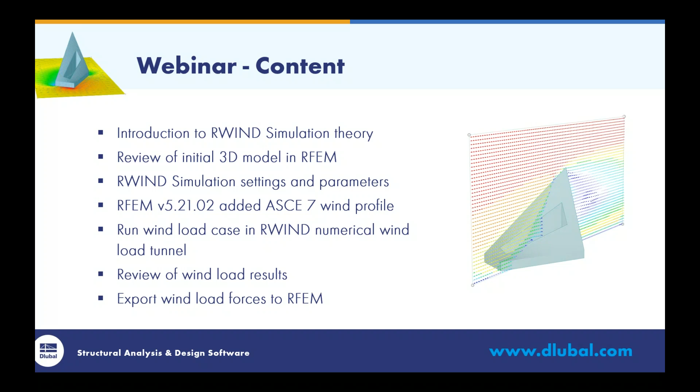RWIND Simulation has actually been a joint collaboration between 3 companies over the last several years, and this includes Dlubal Software, as well as PC Progress and CFD Support. The program utilizes a CFD numerical analysis, and this stands for Computational Fluid Dynamics. What we're doing here is to simulate fluid flow around the structure in a numerical wind tunnel. We currently utilize the OpenFOAM CFD solver, but there will be many more solvers in development, and we'll release those as we come out with them.

In particular, this OpenFOAM solver in RWIND is called simpleFoam. It is for steady state, incompressible turbulent flow. It utilizes the simple algorithm, which stands for the semi-implicit method for pressure-linked equations. Now we have much more information behind the theory of the program that's available in our RWIND manual on our website. But ultimately, we're going to run this calculation in order to get the 3D velocity fields and pressures within the entire wind tunnel. Then from here, what we'll use is the exterior surface and member pressures on the structure to calculate the wind load forces.

When it comes to the CFD finite volume mesh, this is a pre-processing method that is extremely time consuming. We must ensure that all mesh edges have exactly 2 adjacent triangles, that triangles cannot overlap each other, and that model boundaries must be closed. So an engineer might find themselves spending a significant amount of time just creating this volume mesh.

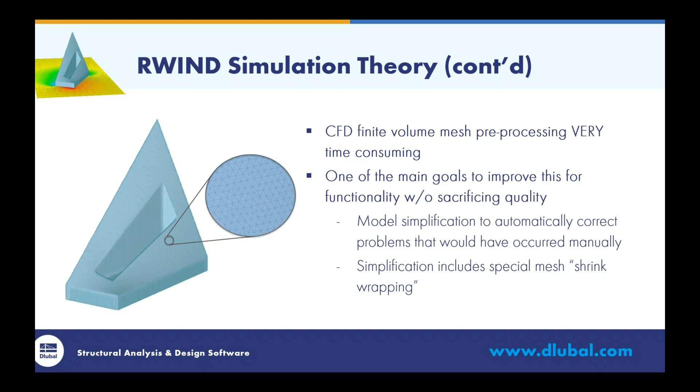If we take a look at the various points we're going to address with this simplified model and the mesh shrink wrapping, the first is to eliminate details that are not relevant to the simulation. A perfect example of this is these 2 flower models over here on the upper right. You'll notice with note number 1 here, we're pointing to the inside of these flowers that have quite a bit of detail going on. By simplifying this detail, we'll go ahead and simplify the model, create a better mesh, but it won't sacrifice our wind loads on the structure. Essentially, these details are not important.

Number 2 is to address the intersection of triangles, and this is denoted by point number 2. Remember that I said that each mesh edge has to have exactly 2 adjacent triangles, and triangles cannot overlap each other.

So you can see by point number 2 that this is not the scenario here, so this is not an ideal mesh. Number 3 is to address open edges and apply zero thickness surfaces. We have these open edges indicated around the exterior of this flower as well as down on our building here for our next example.

So what we can do with these complicated open edges is simply apply a zero thickness surface to simplify that model further. Number 4 is to close the openings to prevent interior airflow.

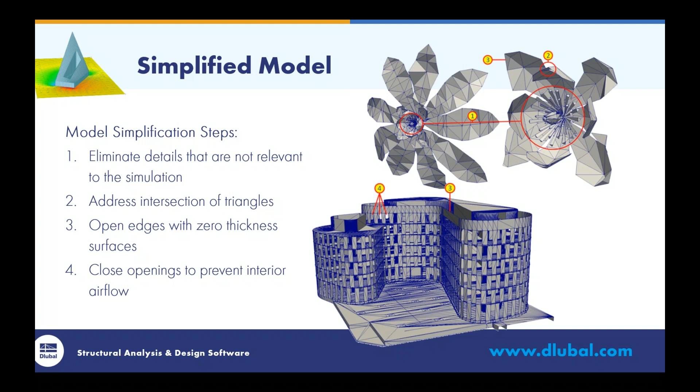So within our wind analysis, we're going to address each one of those points, 1 through 4, with that shrink wrap. Again, I mentioned that we're going to eliminate details that are not important, and we can see that with the same two flower models on the right. We've now eliminated the detail at the center of the model, but this isn't going to affect the CFD analysis and overall wind loads enough to matter. So by simplifying, we can decrease the overall mesh.

Number 2 is the intersection of triangles. Again, each mesh edge has exactly 2 adjacent triangles. The mesh on the left is pretty fine, while the mesh on the right is quite a bit more coarse, so we can see exactly how those triangular mesh elements are lining up adjacent to each other.

Number 3 is to close the open edges. Again, on this model on the right, we can add a zero thickness surface here to close those open edges and simplify further. Number 4 is to close openings to exclude airflow where it doesn't exist, which we can see with our building model down at the bottom. We've closed all those window and door openings.

Now, there is a very important assumption: if this simplified model approximates the original model well, then the calculated wind loads are going to be correct. This is really no different than making sure our mesh is refined well enough to get accurate results. Same concept applies to the simplified model and mesh shrink wrapping around our structure for CFD analysis.

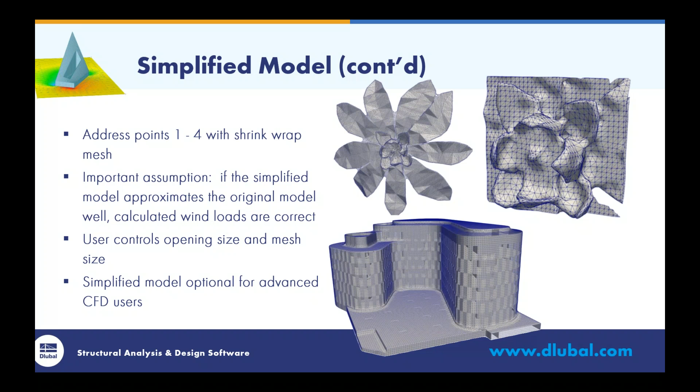There is the option to turn off the simplified model, but this is really only suggested for advanced CFD users. So most of us on today's webinar will always leave this option checked. I'll show you that in the example as well.

A very common question that we have been asked since we released this program is the role of CFD with engineering standards. So I just want to spend a few minutes talking about this discussion point.

The engineering codes such as the ASCE 7, the NBC, and the Eurocode all provide minimum engineering requirements and loads for safety considerations, and of course this includes wind loading.

When we take a look at the ASCE 7 and the various wind load methods, this includes the simplified method for any simple structure, the analytical method for any more complex structures, and finally the wind tunnel method, which is for structures that don't fall within these simplified or analytical methods.

And you'll notice that I did not mention CFD in this list. So the question might be, well, how can we use CFD then when it's not necessarily listed within these standards? How can it still be a useful tool?

That brings me to my next slide here, where I'm going to discuss several points on how we can use CFD as a cost-effective engineering tool for many useful applications.

Now notice that I have underlined tool. We really are not looking to replace the standard and the minimum requirements, but rather how can we utilize this along with the standard to better narrow our focus on how wind loads will affect our structure.

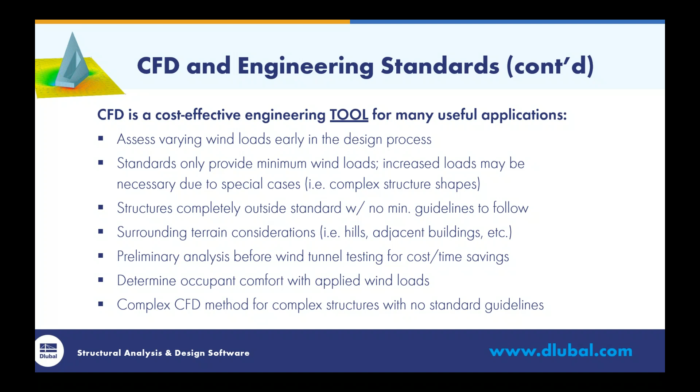Finally, I want to make clear that these complex CFD methods are for complex structures with no standard guidelines. We are not promoting this program to be used with completely rectangular structures. It's easy enough to flip open the code and get those minimum design wind loads. But these are for the structures that we can't so easily refer to the code, and we really have no idea how our wind loads may impact. That's what we really want to promote our RWIND simulation for.

Okay, so that is enough behind the theory. What I want to move on to is our example today and how our RWIND simulation works with our finite element analysis program, RFEM. So we will begin today modeling our structure completely within RFEM.

This includes surfaces, members, and solid elements. Today's example is only with surfaces, but keep in mind that RWIND can definitely handle members and solids as well. So essentially any structure is possible.

We also can set up our various load cases, so dead load, live load, snow load. But when it comes to our wind load case, this is where we're going to export the structure geometry into our RWIND simulation. Here is where we run the CFD wind analysis. And then we can import those wind loads back to RFEM. Now we have a typical load case for wind that we can combine in our load combinations within RFEM.

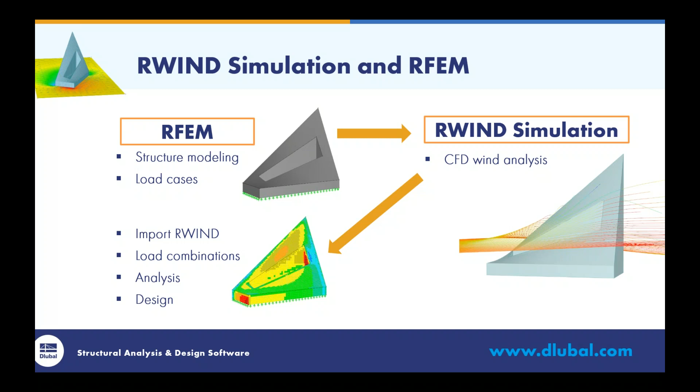Wind, along with dead load, live load, and snow load, can all be considered together, and we go about our analysis within RFEM as usual. Eventually we can move into the design add-on modules. That's a little background on the theory and how the programs work together. Now let's get started with our example today.

You'll notice here that I've modeled a very simple but interesting geometry for our structure within RFEM. For anyone joining us today from New York City, this structure may look familiar. I modeled it after the building located in New York City called Via 57 West. You'll notice how interesting the geometry is. First we have this triangular type structure, but even more interesting is this huge opening right here in the center, which goes all the way down to the courtyard at the base of the structure.

So although it may be applicable to refer to the standard to get minimum design wind loads, I would certainly say that the standard does not address a building with this type of geometry, especially with this large opening in the center. That's essentially what I've done here.

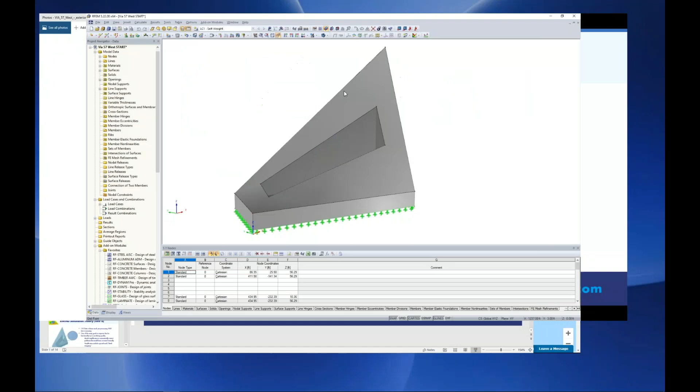You'll notice that I created this structure and it's very simplified. I didn't add any windows or doors. The interior of the structure is not modeled, it's just to get the overall basic geometry. We can see that I've modeled this with surface elements. We have double curvature at the front of the surface, and I've taken into consideration the large opening right here in the center. So this is just the basic geometry of our structure.

Now I've also set up a single load case here for self-weight. I haven't created any other load cases quite yet, but let's move into our first wind load case scenario.

Under Calculate, I can access our wind under RWIND simulation, where we can simulate and generate wind loads. This brings up my dialog box here that I'd like to go through in a little further detail in order to set up our parameters for our CFD analysis.

The first step is to define the wind directions. You'll notice that the program automatically sets a uniform step here. So if this is set to 45 degrees, you'll notice that every single direction is defined: 0, 45, 90, and so on. We could change this to 90 degrees, and now we have only 4 defined directions.

You'll notice that on the second tab here, this lists out the individual load cases. So we have wind in the 0 degree direction, 90, 180, and so on. Now, if you only have a few different scenarios that aren't necessarily defined at each one of these steps, we can manually define the direction. Let's say I want 35 degrees and 135 degrees. Again, on this second tab, we can see that both those load cases are automatically updated.

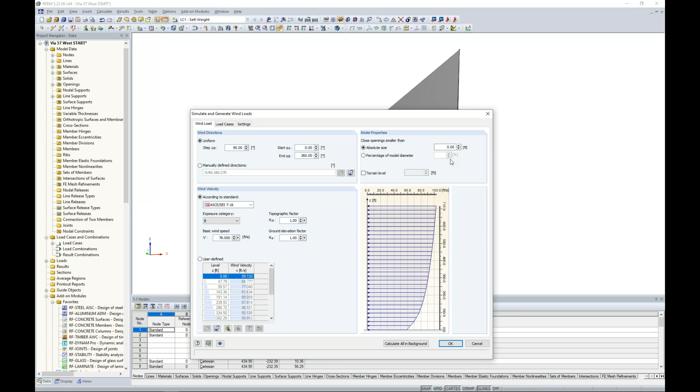Remember in the PowerPoint, I said the user has the ability to close the opening size that they define. In this example today, I don't have any openings necessarily, but if I did, I could enter in values here to close windows and doors. We do have an extremely large opening in the center, and I certainly don't want to close that because I want the wind flow to be allowed to move freely within that area. So for today, we'll just leave this as 0.

Now the terrain level - if we had modeled a basement for our structure and we do not want that basement height to be exposed to the wind profile, we could set the depth here. For example, if we had a basement that was 30 feet in height, we can type in 30 feet, and now the wind profile will be applied at the elevation of 30 feet and above. We don't have a basement for today, so we can leave this unchecked.

Then we have the wind velocity, where we can define our wind parameters according to a couple of standards here. We have the Eurocode available to us, and just last week we released the ASCE 7-2016. Now, if you are utilizing a standard which is not found here, such as the NBC code or something other than ASCE 7 or Eurocode, it's no problem, because all you need to do is define this user-defined option.

This allows you to define the wind profile, including the wind velocity as a function of height. You can import and export directly to and from Microsoft Excel, which might be quick if you generate a spreadsheet and import those values here.

The basic wind speed is defined as a velocity in feet per second. This information should come directly from ASCE 7 and the wind load maps. It might be helpful to take advantage of our GeoZone tool on the Dlubal website. You can find this tool at dlubal.com. Under Solutions, you'll see the GeoZone tool available under Online Services.

What we've done here is consider all of the loading maps for snow load, wind load, tornado, as well as seismic, directly from the ASCE 7 standard. We've synced it with Google Maps, so all you need to do is type in your address and hit search. The program will give us the relevant values from ASCE 7.

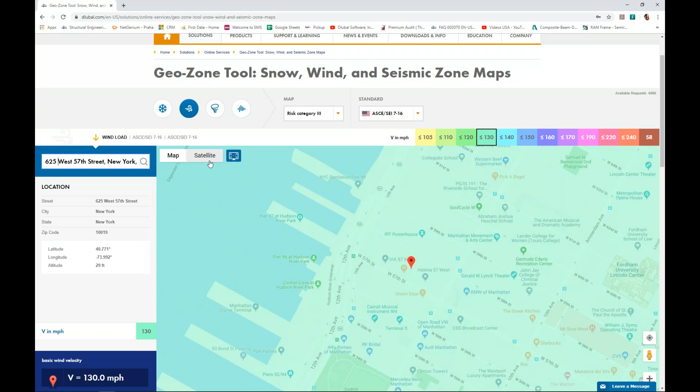For our example today, our address is located at 625 West 57th Street. The program automatically determines that this is located in New York City. We can use our zoom function to zoom in all the way to where our project is located. We can even turn on the satellite view, and sure enough, we can see our structure, 57 West, located right here where our map is pointing.

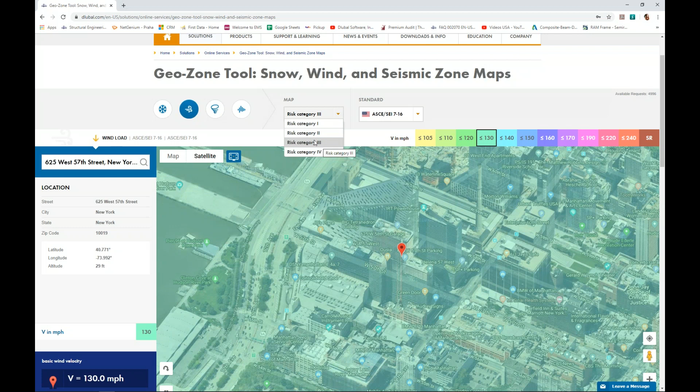We just need to determine the risk category here, which is set to risk category 3. Ultimately, the program gives us a basic wind velocity of 130 miles per hour, again coming directly from ASCE 7. So it's a useful tool if we're trying to quickly figure out what this wind velocity should be. We convert this to feet per second, and we get 190.67.

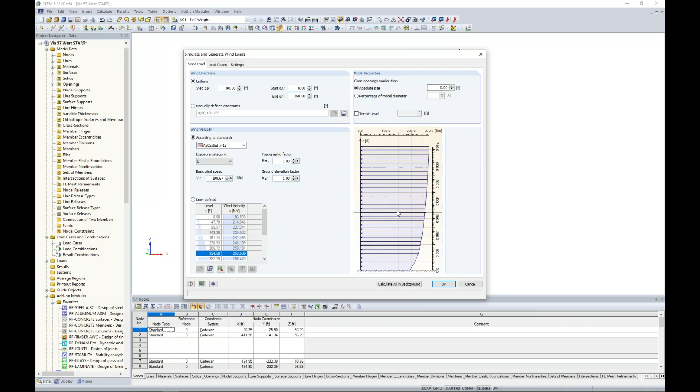Based on all of this information, our wind profile updates automatically, so we don't need to do anything further. We can also see it graphed out on the right-hand side.

The second tab, which I've already briefly mentioned, just lists out the various wind load cases depending on which direction our wind is coming from. We'll get back to this in just a minute.

The third tab is the settings for the CFD analysis, which is a bit more theoretical than what we've seen so far. The flow parameters for air density and kinematic viscosity must be defined. It depends on where your project is located, especially with elevation. The defaults here are relatively close to what you'd find at sea level, so we can leave those defaults, but certainly determine your air properties for density and viscosity for your project and input them here.

The calculation parameters include the density of mesh for the fluid dynamics calculation. This is used for the model simplification we talked about, and the fluid calculation controls the finite volumes around the structure. We'll see this in a minute, but this refers to the actual wind tunnel itself and our 3D finite volumes.

The default here is 10%. The range is anywhere from 10% to 100%. Obviously 10% is the most coarse, with 100% being the most precise. But keep in mind, when you set this to something like 100%, the calculation time could take anywhere from several hours to several days. So you want to determine a good balance so you're not waiting too long, while still getting accurate results.

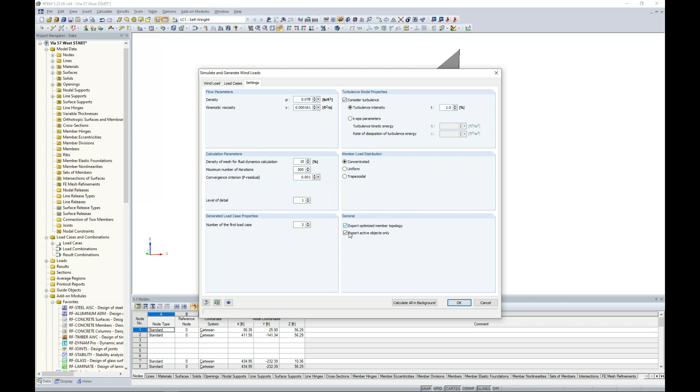But by all means, if you would like to export out the exact geometry of these cross sections, you could uncheck this here. This checkbox to export active objects only refers to if we had some other elements back in the RFEM model that we had modeled but didn't want to be considered for the wind load - we could deactivate them. In our case, it doesn't matter whether we check this or uncheck this because we only have one structure.

Okay, so back under the load cases here, we are now ready to begin our calculation within RWIND. The most efficient option would be to choose this button here that says calculate all in background. So what essentially will happen is that RWIND will never open - everything is going to happen behind the scenes. The program will run that calculation, and eventually we're going to get checkboxes here for calculated, and the load cases will automatically be available to us within RFEM.

Now, on the other hand, if you're wanting to see the actual calculation within RWIND, which we do today because I want to explain several of the program features, we can place our cursor on any one of these wind directions.

Now, these angles are based off the global x-axis, and this is true in either program. The x-axis will be oriented in the same direction. So when we are considering wind from the 0-degree direction, we're going to have wind flow from left to right on the structure. This structure is at a skew, so I'm not going to have wind directly normal to the front face, but rather at somewhat of an angle.

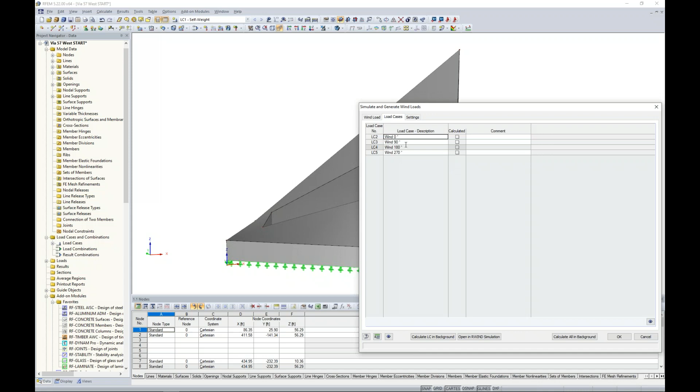So it should be quite interesting to see once we get into RWIND. And of course, we're just going to move around in a full 360 circle until we have fulfilled all of these different load cases. For today, let's just consider the 0 load case. I'll put my cursor in that cell, and I can open RWIND simulation.

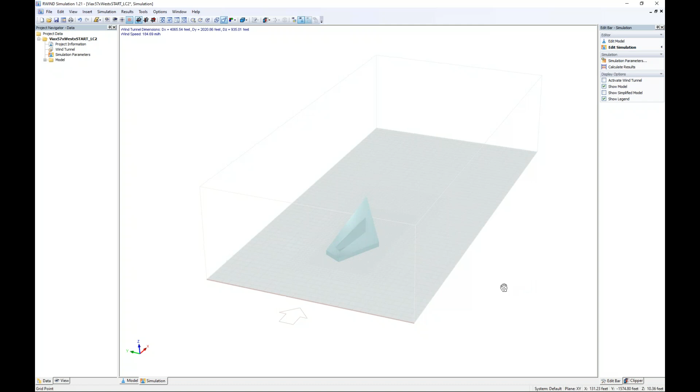You'll notice that within a split second, my structure geometry is imported into our standalone program, RWIND. We can zoom in to view this structure, and the model geometry is quite exact. It includes that double curvature front surface, and you'll notice we also have our opening located up here at the top. Everything is brought in directly from the program without having to select any further modifications.

The first thing I'm going to do is activate my wind tunnel, which I can do under my display options. So here exactly is our wind tunnel where we're going to run this numerical CFD analysis. If I change my view settings to the reverse Z direction, I'm now looking at a plan view, so we can see my structure. As I mentioned, it's located at a skew in relation to how the wind flow goes through this tunnel. By the big red arrow, the wind flow will be from left to right.

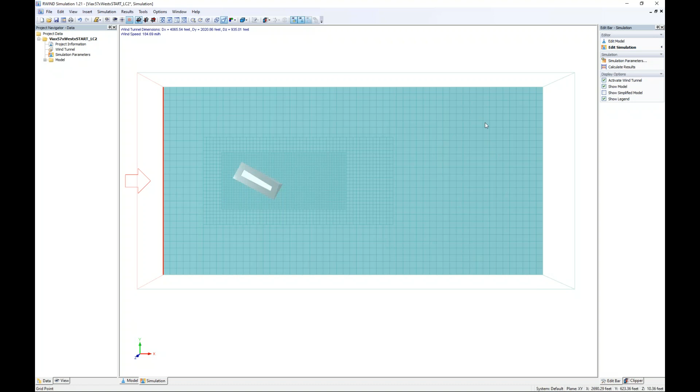You'll also notice the meshing of the wind tunnel itself. This is what we have set with the density of the mesh at 10%. When we're on the exterior of this wind tunnel away from the structure, it's quite coarse, but as we move in closer to the structure, you're going to see a more refined mesh.

Going back to the isometric view, let's take a look at the simulation parameters. I'm going to double click the option in my project navigator. Realistically, this is all information I've already set within RFEM, but I do have the ability here to make any changes if I'd like. Just know that we don't need to repeat any of this information—it's brought in from RFEM.

For example, we have the flow parameters, which includes the inlet velocity—the wind speed entering the tunnel. We also have the kinematic viscosity and the density of our air. Remember, we left those at default.

We also have the finite volume mesh settings, which we had set to 10%. Notice that as I use this slider bar to increase this, my mesh changes on the right-hand side—we're increasing the number of 3D volume elements for an increased mesh total. That's going to change quite significantly, so you can imagine when we're all the way at 100%, with these many 3D volume elements, why it takes such a significant long time to run the calculation.

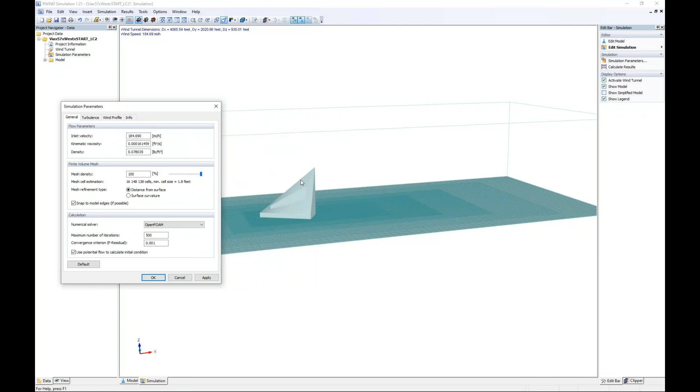These mesh cells are only 1.8 feet wide, and keep in mind this structure, although it looks small, is about 480 feet high, which was modeled in RFEM. So we'll go back to 10% here, for a mesh cell size of about 18 feet.

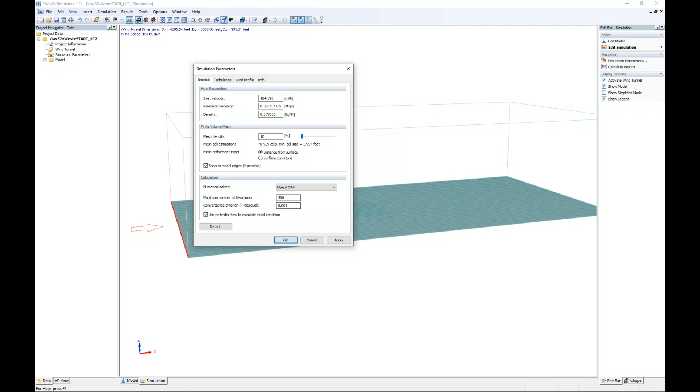The calculation utilizes the OpenFOAM numerical solver. As I mentioned, we're working on more solvers in development at the moment, so this is the one we'll be taking advantage of. The max number of iterations and the convergence criteria, 500 and 0.001, were brought in from RFEM. Same concept for our turbulence tab.

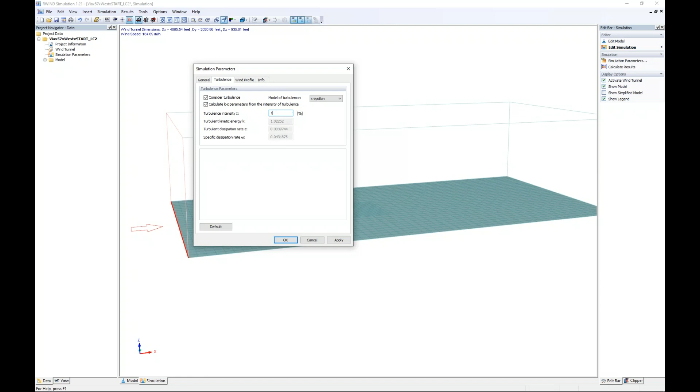Here we have set the turbulence intensity to 1%. You'll notice that the turbulent kinetic energy, the turbulent dissipation, and the specific dissipation are all calculated automatically by the program. If we change this to 5%, again you'll see these numbers change. We'll just be going with the 1% that we previously set.

And finally, we have our wind profile here, which again is the information we set according to ASCE 7—simply the wind speed as a function of height as we move up along the height of our structure. We can make changes to this here as well.

So I'm actually going to hit cancel because we want to leave everything as we've previously defined it. Similar concept for our actual model here.

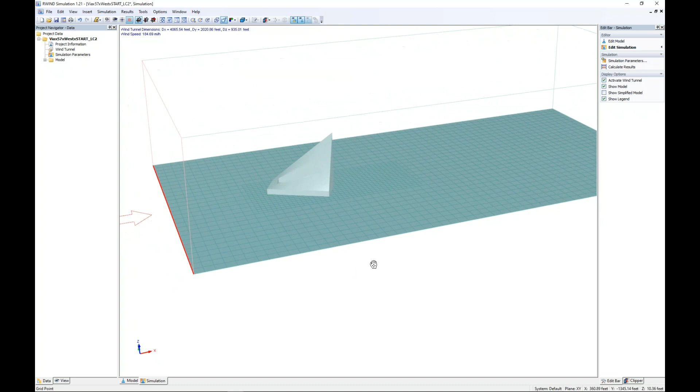Under the model tree, I can double click and see a few of the settings brought in from RFEM. One thing we didn't specify in RFEM is that this is the primary model. The program automatically recognizes this and puts a checkbox here. A little bit later on, when we consider adjacent buildings, you'll see how this differs. The model simplification is set to 1 for the level of detail.

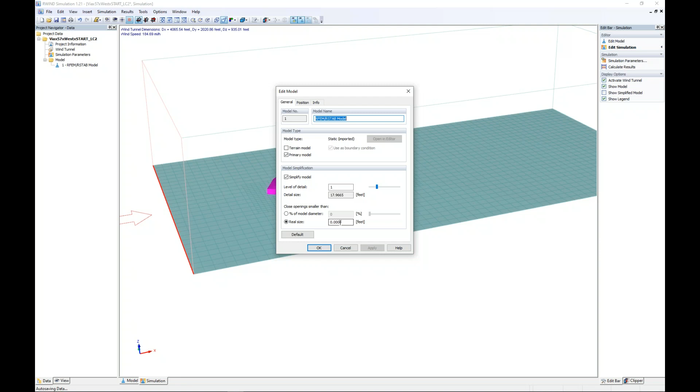Let me also quickly mention, you see this checkbox here for simplify model. Remember, you do have the ability to turn off the model simplification, but it's only suggested for advanced CFD users. So the level of detail we've set to 1 for our example today, just for a pretty quick calculation since we don't have much detail we're worried about. We also have the openings that can be closed for any distance we specify here. We will not be making any changes, so we can click cancel out of this. I just wanted to quickly go over it.

The final thing to discuss before running our calculation is the actual wind tunnel itself. So I can double click the wind tunnel settings, and you'll notice the dimensions are defined with different points. We have a point at the upper right corner, the lower right corner, and the upper left corner in the back, which defines this rectangular wind tunnel for us.

Now, if you want to make any changes here, you can. The program automatically adjusted this wind tunnel based on the structure we're bringing in from RFEM and its geometry. But if I decide I want to extend this wind tunnel to maybe 4,000 feet in the back, I can just type that in. I'll hit apply, and now you'll see my wind tunnel is extended.

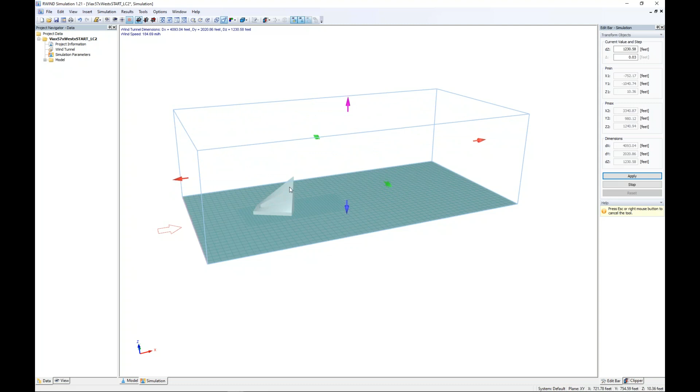In a similar sense, we have the ability to adjust this tunnel graphically as well, so we can choose this option here. Now we have arrows that allow us to slide in the dimensions, whether at the top or bottom, left or right, and that will automatically adjust our wind tunnel. Going back to the wind tunnel settings, if I've messed around too much and want to go back to the suggested size, we can click this option, adjust to model, hit apply, and now we're back to the original settings.

Okay, so we are now ready to run our calculation. We can click calculate results in the edit bar, and the program gives us a quick update list of what's happening, including the number of mesh cells. It's applying that shrink wrap mesh to our model, and it's also going to account for the closed openings, the level of detail, and all those parameters we've previously set.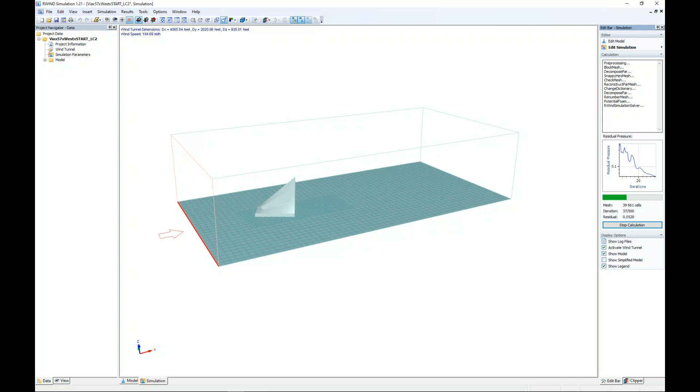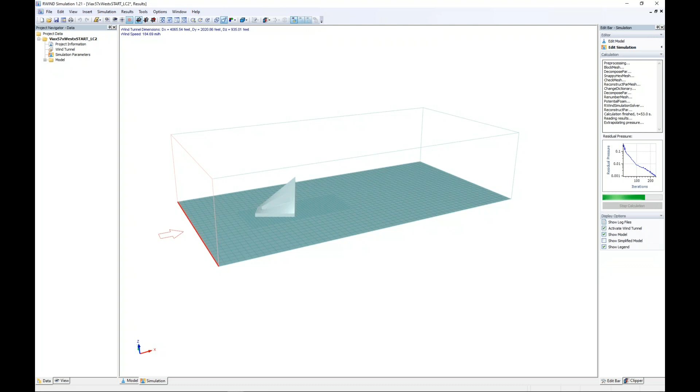I did want to mention too that the OpenFOAM solver is an extremely powerful tool for not only wind calculations, but also for fluid and heat. But with that said, all of the internal options within RWIND software were created with wind loading only in mind for the structural engineer. So although the OpenFOAM solver has those capabilities, maybe in other programs, it does not within RWIND. You only want to use this program for wind calculations only.

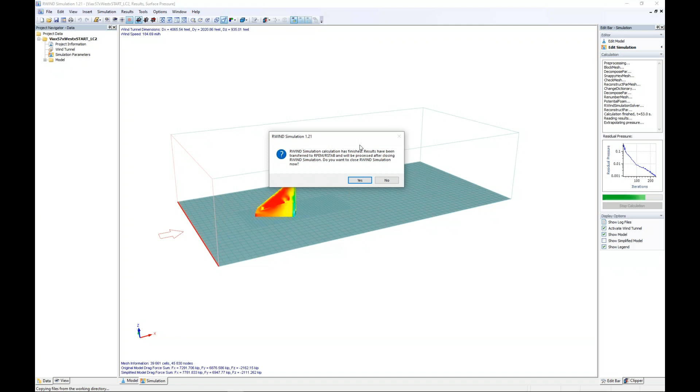So once we're done with the analysis, the program gives us this option and says the calculation is finished. Do we want to close RWIND? Yes or no. When we close RWIND, the results will automatically be imported into RFEM, which we'll see a little bit later on. But for now, let's click no and take a look at our results that are available to us in RWIND itself.

The first thing I can do here is deactivate my wind tunnel so we can see this a little more clearly. We'll zoom in here. Also, under the View tab within the Project Navigator, the interface is set up quite similar to RFEM for those familiar with it. Under the View tab, we can deactivate and activate different features we're currently viewing in the graphical interface. For example, I can expand the model tree and activate these triangular edges, which just shows me my mesh around my structure.

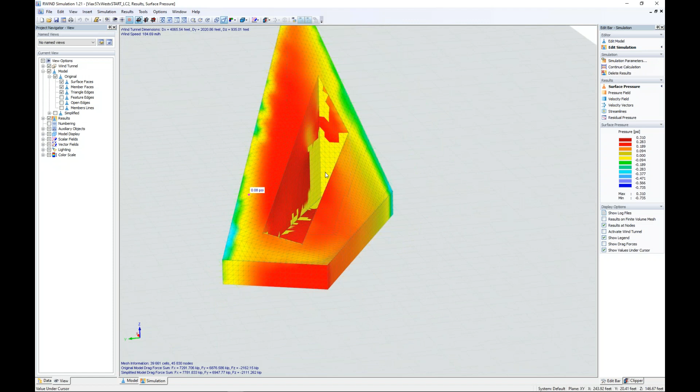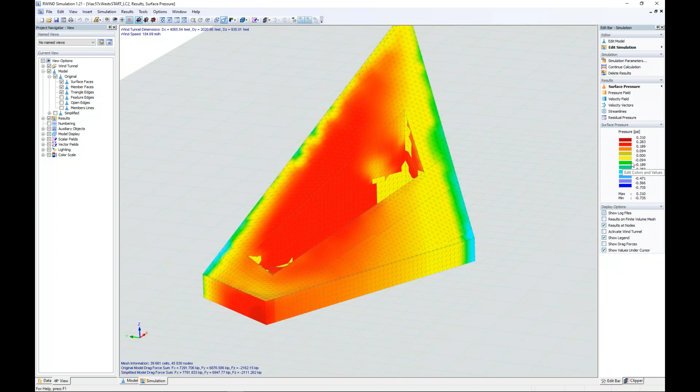I think this clarifies a little bit further what's going on with these wind pressures. We're currently viewing the results here for surface pressures on the structure. As I move my mouse around on the structure, I'm getting the pressure magnitudes, and the colors are based on the magnitude shown in our color navigator on the right-hand side. We can see even down into that opening how the wind is affecting our structure.

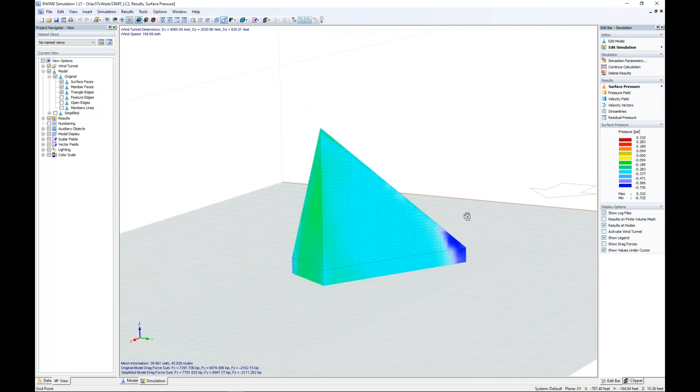We can also rotate the structure completely to the back side, and you'll notice a negative value is given. This means these are no longer compression forces, but suction wind forces at the rear of the structure, with the highest suction forces in the lower right-hand corner. Ultimately, what we're seeing here is the final results from the CFD calculation on our structure only.

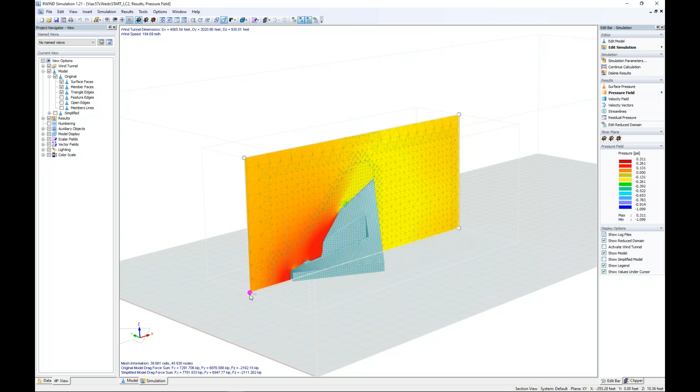What we can also view is what's called the pressure field. This is a plane which represents the wind pressure distribution of the airflow throughout the wind tunnel, not necessarily just on our structure, but throughout the entire wind tunnel itself. With the pressure field, I can simply drag this plane from left to right to see what's happening in this area around my structure.

In a similar sense, we can change the plane and drag it from top to bottom to view those various pressure fields. One thing to point out is I said this is throughout the entire wind tunnel, but it looks like it's really only isolated around the structure. That's because we have this option checked to show the reduced domain. When I uncheck this option, now we're seeing the pressure field throughout the entire wind tunnel.

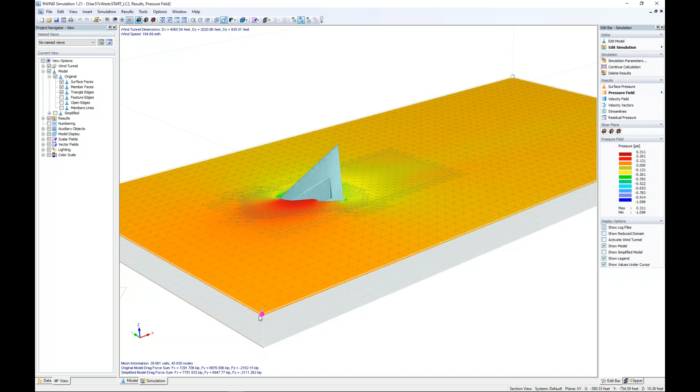We're making the assumption that you're probably most interested in the results closest to the structure rather than way out here within the wind tunnel, so that's why we've given you the option to show the reduced domain. The pressure is given here according to these various colors. You have full capability to change units within the program—right now it's given to us in PSI. If you want to make changes, you can find that under Options and Units.

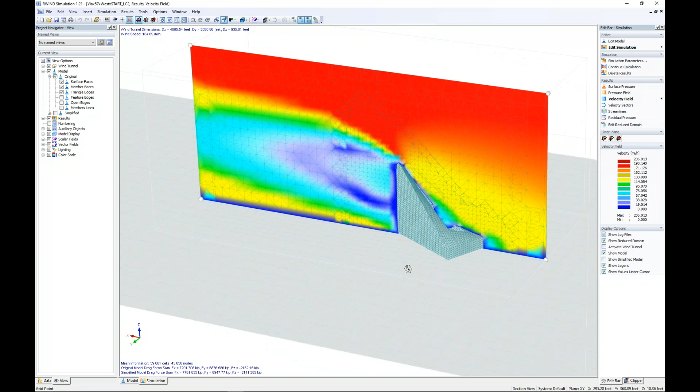In a similar sense, we have the velocity field. We can activate the velocity field, and similar to the pressure field, it's in a two-dimensional plane that we can move around our structure. What might also be interesting is to change the plane to view what's happening at the rear of the structure with a lot of those suction forces. All magnitudes are given here in miles per hour as a function of color.

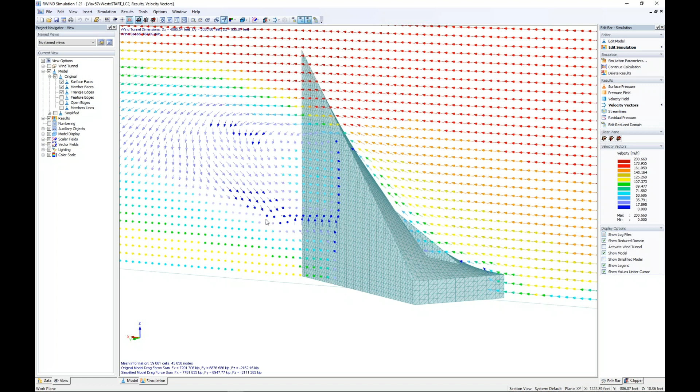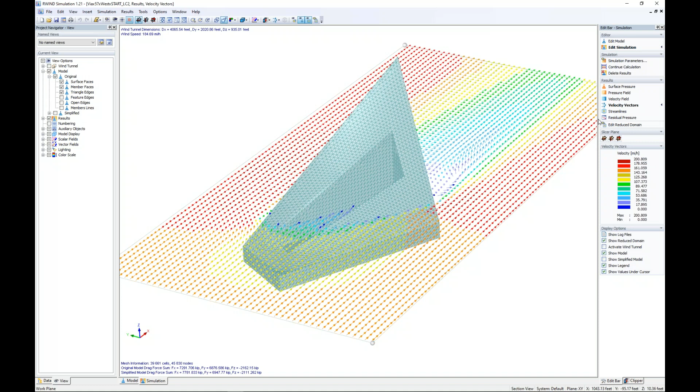The velocity vectors—for this I'm going to completely deactivate my wind tunnel so we can see this more clearly. The velocity vectors evaluate both the wind speed and direction, so now you'll see arrows showing exactly which direction the wind load is being applied. Changing planes here to our horizontal plane, we can take a look in more of a plan view at those magnitudes, those wind speeds, and also directions.

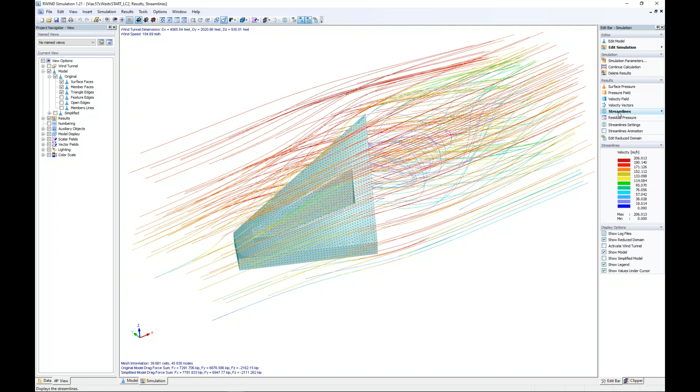And finally, this leads us to streamlines, which is probably going to give us the best effect for understanding our wind loads here. Streamlines are a composition of curves which are tangent to the velocity vector. Essentially, this shows the direction a massless fluid element will travel at any point in time, and again these colors vary by speed. Similar to just showing the streamlines as a static view, we can also activate the streamlines animation.

This is a great visualization, a nice video showing us these wind forces acting on our structure and how exactly those massless fluid elements are moving. If we want to export these videos, we can do so under Tools and Create Video File. This is extremely beneficial to send with your calculation package, or to any reviewing engineer, just to show how those wind loads are being applied.

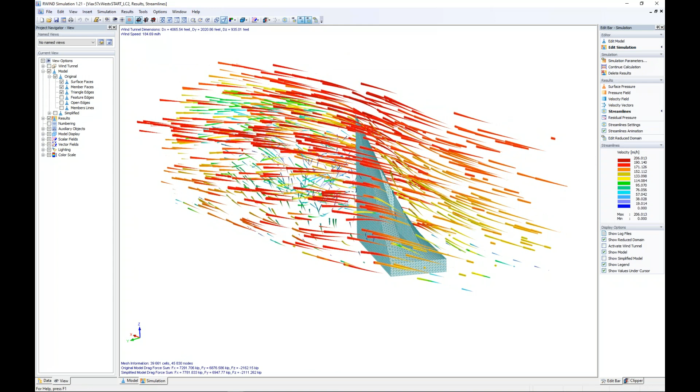So we can deactivate this animation, and I want to go into a few more options within these streamline settings because it is quite powerful what we have the ability to view here. The default is a 3D box, which we can see here. Now, similar to the wind load tunnel, we can grab this 3D box, move it, increase it, or decrease it.

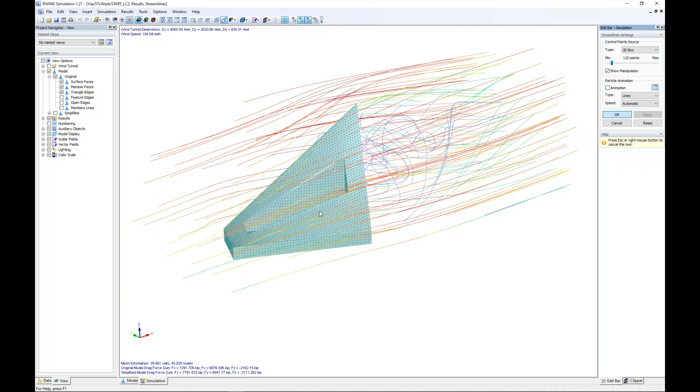We can also decrease the number of points, since it's pretty overwhelming right now. We hit apply and OK, and now we have quite a few less streamlined particles to show, making that video maybe a little bit more clear on what's exactly happening.

Going back to the streamline settings, not only do we have the ability to define a 3D box, but we have several other settings, including a segment, which is just a particular line. You can drag this line up and down, left and right.

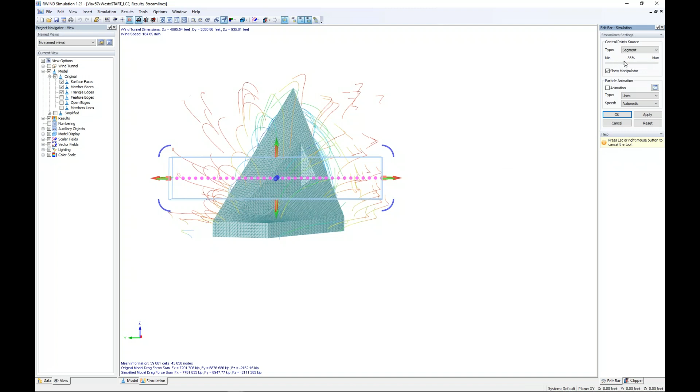Perhaps we want to increase the number of points significantly here. I hit apply, I hit OK, and now we can see how those streamlines are moving throughout our structure at just a single line element. Different ways to manipulate this view so we can see exactly what's happening at different locations.

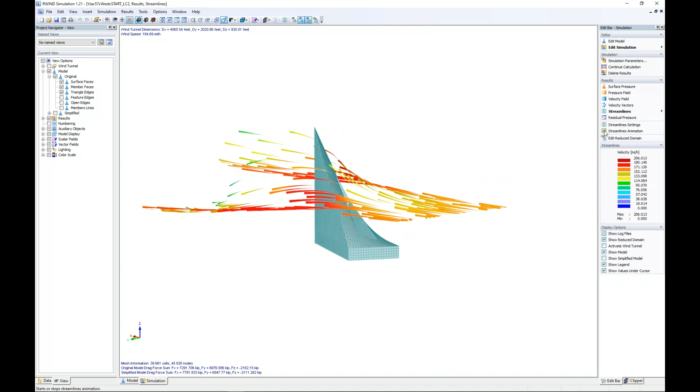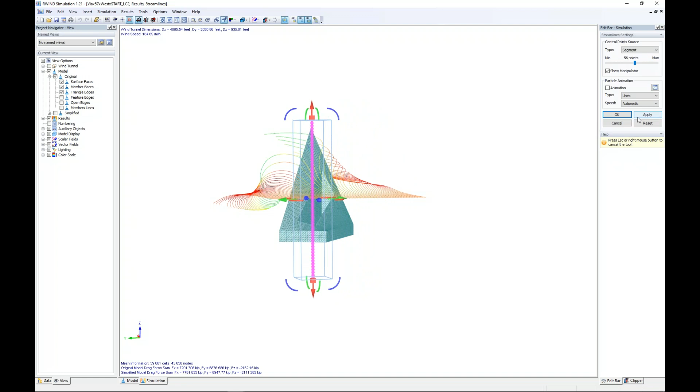What's also nice about these streamline settings is it doesn't necessarily need to be a horizontal line, but we can actually rotate it vertically. Let me move it in the vertical direction, over to the right of the structure a bit. We hit apply, move it a bit further over, hit OK, and now we can see it in the vertical direction as well.

So many options here, and this is endless, but you can add these to printout reports, and you can export these streamline animations as video files as you see fit.

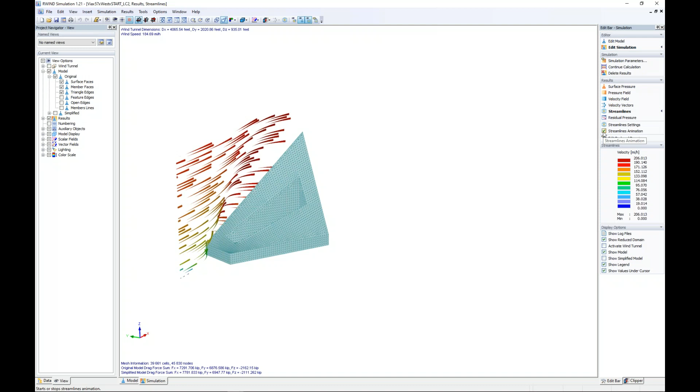Ultimately with these results, if we turn off our results, let's activate our wind tunnel again, and turn off this triangular meshing. We have only analyzed the structure within this wind tunnel by itself. If you remember back to the PowerPoint, a very powerful feature of CFD numerical wind analysis is to account for complex terrains or adjacent buildings.

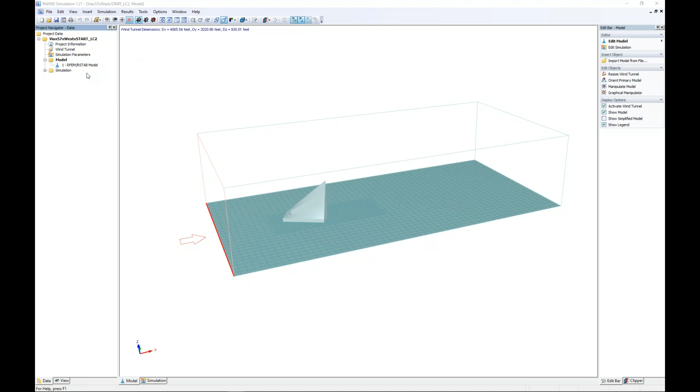So how do we do this? Under the Data tab, I can right-click on the model to import a model from file. I want to account for some adjacent buildings located right next to my project that will definitely influence the wind load. We have a few file extensions still in development, but what we do have available is an STL file. I use SketchUp, exported my adjacent structures as an STL file, and now I can easily import them here, found directly on my computer wherever saved.

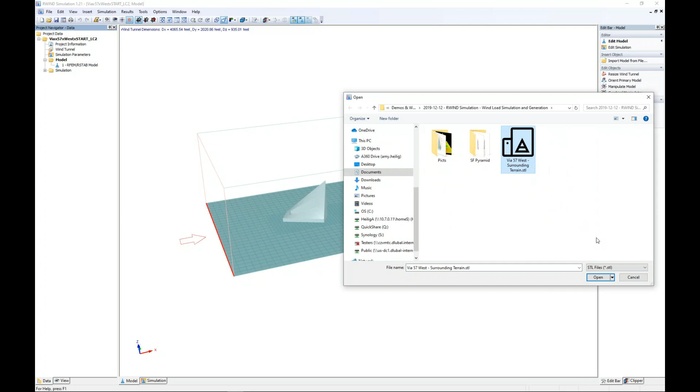I click open. I'm going to adjust the wind tunnel dimensions, but I'm not going to move the imported model to the origin. I'll make a few movement changes once I import. When I click OK, the program says my results need to be deleted, and I click yes, that's fine. Now let's deactivate our wind tunnel and zoom in.

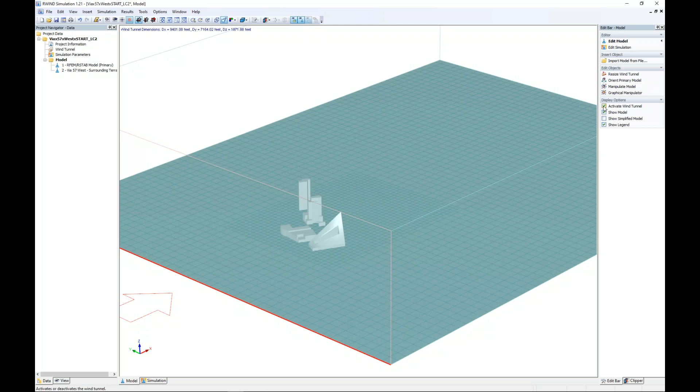I now have some adjacent structures to my original structure. The location of these isn't quite right, so I can either drag and drop it wherever I'd like, but probably the more accurate method is to double click, and you'll notice neither option is checked. The primary model is of course our model brought in from RFEM, so we don't want to specify this as the primary model.

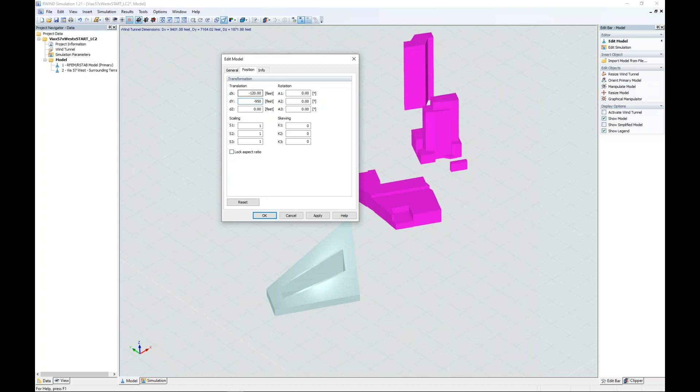If this was a terrain STL file, we'd want to modify this so the wind tunnel itself would be modified, but this is just some adjacent buildings. We want it to influence the wind load, but it's neither one of these, so both can be left unchecked. Under the Positions tab, I can modify the origin of this imported file. For today, I want to modify to negative 120 feet in the X and negative 950 feet in the Y. I click apply, hit OK, and now we can see how these adjacent structures sit right next to the building in question.

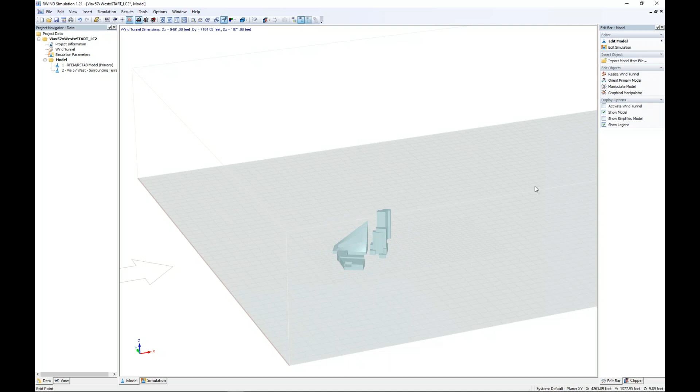So inevitably, this is why I want to account for these adjacent structures, because I know the wind loading is going to be affected based on where these are located. You can imagine that when we start to consider wind loads, especially in the 180-degree direction, it's going to be significantly impacted by these rear structures.

The wind tunnel, when we first imported this additional file, was automatically updated, but then I moved these adjacent structures around a little bit. So remember, all I need to do is double click on the wind tunnel, adjust to model, and click OK. Now my wind tunnel is slightly smaller here, and we're ready to begin our calculation.

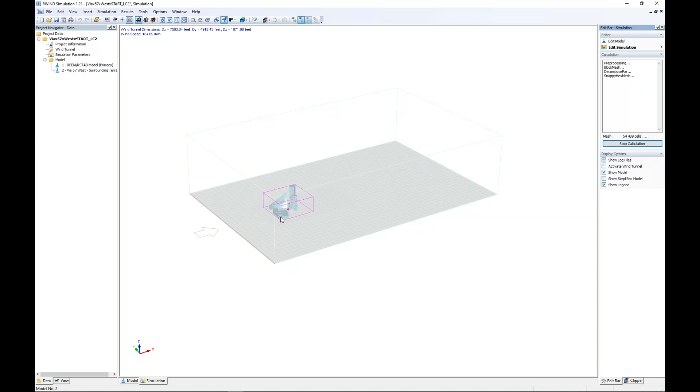So I can calculate my results, and you'll notice a couple things here. First, we have a bit more mesh than previously, for a couple reasons. We had to increase the size of our numerical wind tunnel to account for the additional structures, and we're also applying a mesh shrink wrap around these adjacent structures. Once the program finishes applying this shrink wrap to both the adjacent structures and our structure, accounting for the 3D volumes, we'll get essentially a pressure diagram.

This pressure diagram shows residual pressure as a function of the iterations, illustrating the progress of the applied pressure during the iterative simulation process. Remember, we set our convergence criterion to 0.001, so the program is working to reach that. The solver starts with an initial pressure value, and the simulation refines the residuals with every iteration, ultimately trying to reduce the pressure imbalance.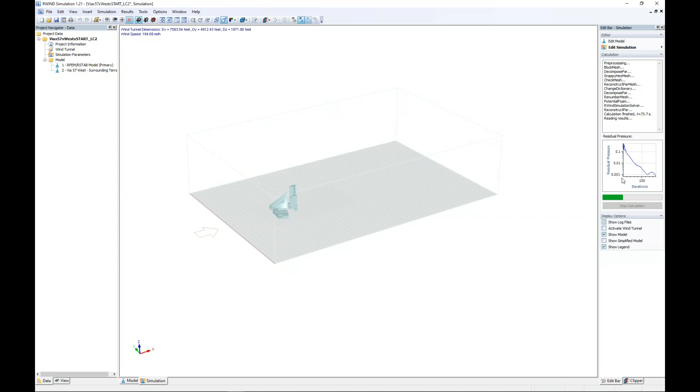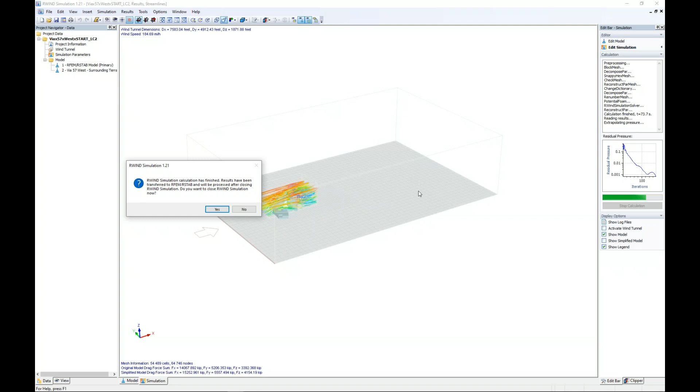If you see this graph oscillating a lot while solving, that probably means there isn't great convergence, and we need to make some changes to our model. One helpful change is to increase the length of the wind load tunnel, since sometimes it's too short and increasing it improves convergence. We could also make changes to the meshing, whether it's the density of the wind tunnel or the details of the structure. So there are quite a few changes we can make to find better convergence.

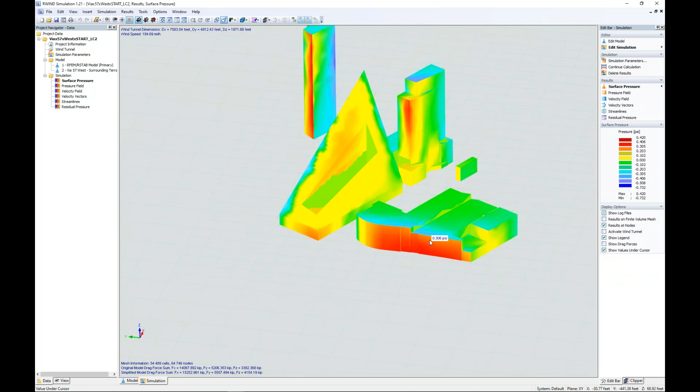Ultimately, though, we are presented with our results here. We don't want to leave our wind tunnel quite yet, so let's take a look at the results. Let me jump to surface pressures, and we can see the high surface pressures at these adjacent buildings, which are available to us. Ultimately, we're looking at how these adjacent buildings impact the structure we're designing.

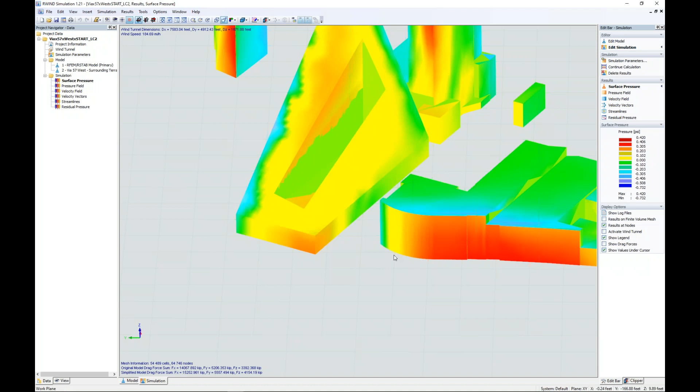You'll notice that in some locations situated behind this adjacent building, I'm getting extremely low pressure values, down to 0.008 psi, whereas previously we had fairly high pressures there. That's how these adjacent buildings can impact our wind loads.

Now, there's really no reason to go through the rest of these results—it's exactly as we just covered. We have the ability to view all of the results just like before, but now considering the adjacent structures. So what I'd like to do is exit out of the program, and notice it didn't ask me to save, it asked me nothing, because everything is brought in from those wind loads into RFEM. So we're back in our finite element analysis program, RFEM.

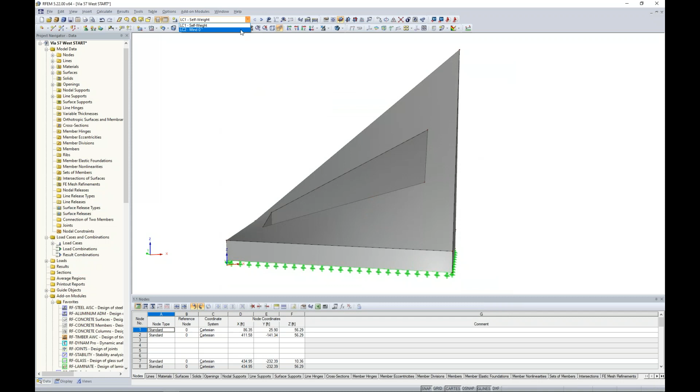You can see that the calculated checkbox is now activated here. I can click OK. Now we have not only self-weight, but a second load case for wind in the 0 direction. I can activate these loads—let's turn this into a rendered view.

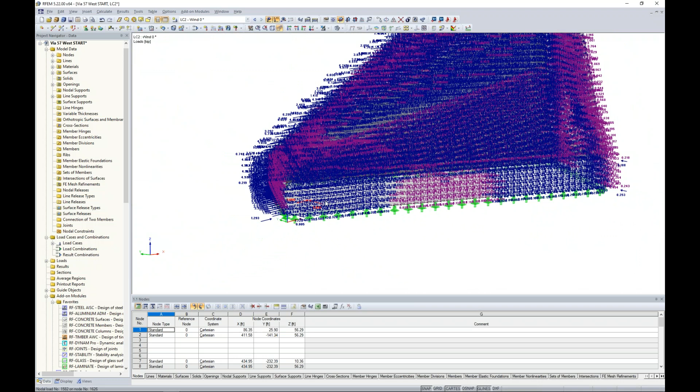It's quite overwhelming if we take a look at wind in the 0 direction, and that's because we're bringing in all of those wind loads and applying them to every mesh point here, in both the X and Y direction. So that's what's going on underneath the hood. A little overwhelming, so we can deactivate those loads.

What we can do instead is run a quick calculation of just this particular load case in the 0 degree direction to see what our results look like—a quick linear analysis—and we'll be presented with our results in RFEM. Maybe I want to take a look at the deformation, and I can see here that based on my high suction forces in the rear of the structure and high compression forces at the front, I have some deflection that looks similar to what we're seeing here.

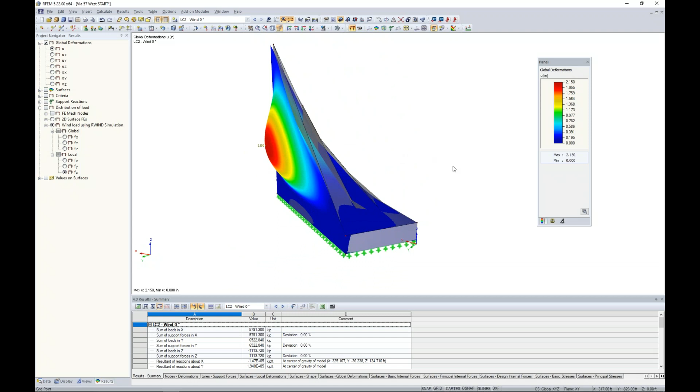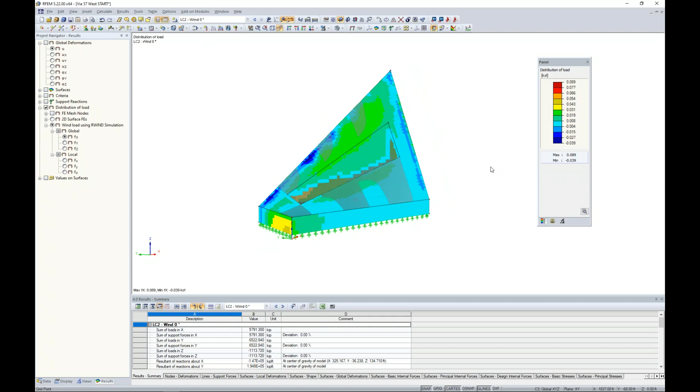What else we can view is the feature under distribution of load, which was just added - wind load using RWIND Simulation. This allows me to view the wind load distribution brought in from RWIND for this particular load case, for example the approximate distribution of load in kips per square foot or whatever units I have set on my structure.

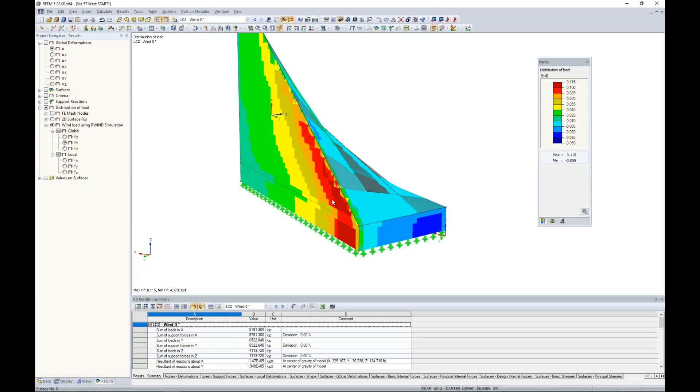This is according to the global X, Y, and Z axes, which are displayed in the lower left. We can change this to the Y view, showing global distribution of load according to the y-axis. Again, this is where we're seeing those extremely high suction forces on the rear of our structure.

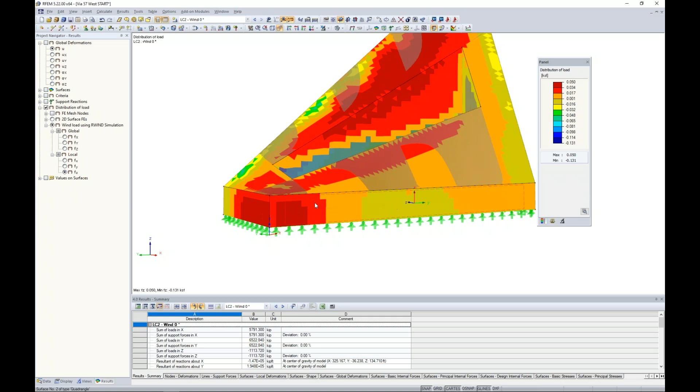Ultimately, we can view load distribution based on a surface's local axes. The z-axis is normal to the face of these surfaces, and local axes are indicated by lower x, y, and z. So if we're interested in viewing load distribution on each individual surface relative to the local axes, we can do so.

What's so powerful is getting realistic wind loads for these complex geometries. We can even see down in the opening of this structure exactly what the wind load distribution looks like. We have essentially no wind load at the bottom, but fairly high wind pressures on the upper inside surface.

Now we have imported this single load case. I wanted to point out, if we go into our load cases and combinations, we have our self-weight and our wind load here, which we can change the action category to wind. What we can do within RFEM is create a load combination.

So we create our first load combination combining both the self-weight as well as this wind load case. You can imagine we can also combine live loads, snow loads, any other particular load case. This is what we can solve for within RFEM to get an analysis considering not only the wind loads but all other load cases.

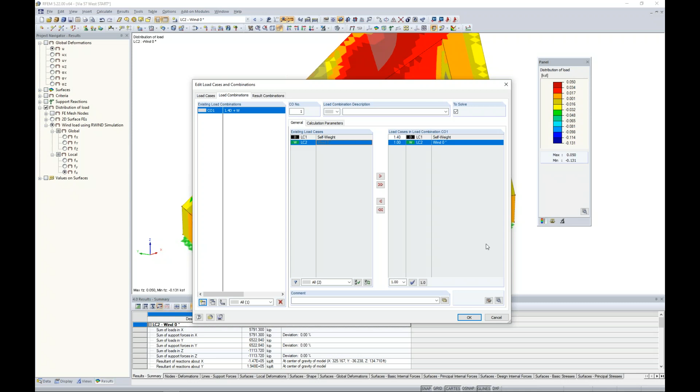Eventually we can move into design of the structure within our add-on modules. So quite powerful in the sense that just importing a simple load case for wind load, we can go about the analysis and design as we normally would.

Okay, so that concludes the webinar for today.